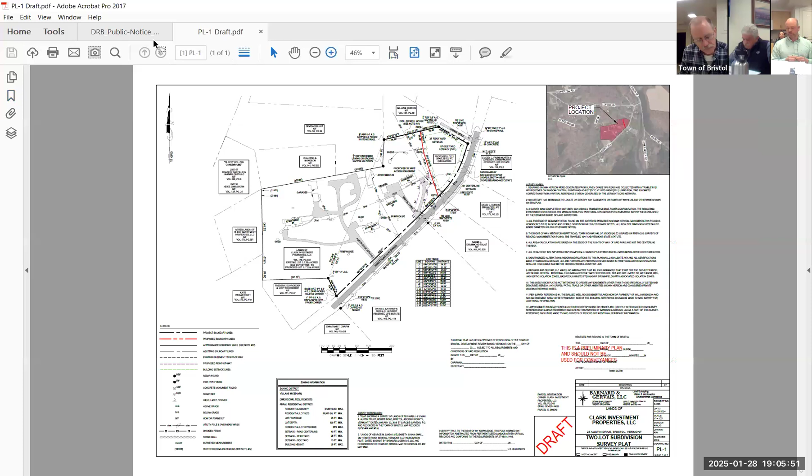The easterly portion of the property, I think everybody is familiar with the parcel, on Hewitt Road. There's a number of residential rental units which Martin and Kathleen purchased about a year and a half ago. That's the two of them. What they're looking to do, their daughter and son-in-law, would like to build a home in Bristol, close to town. They came to us about subdividing off the easterly portion of the property, which is lot 2 on the map, 0.83 acres in size.

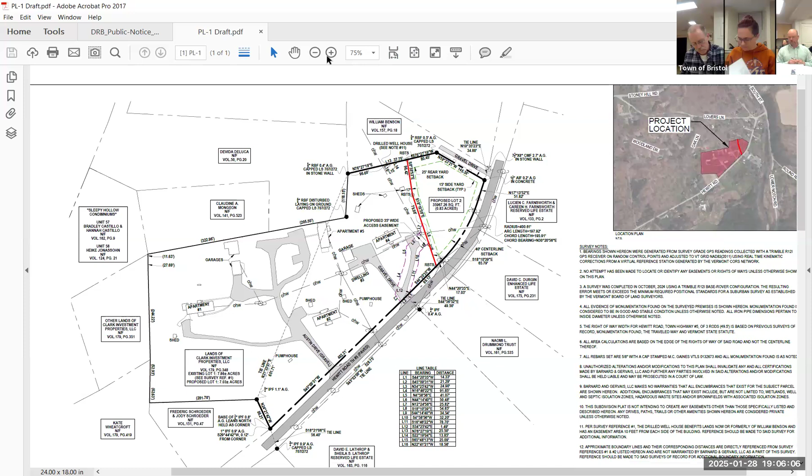There actually used to be, a number of years ago, a mobile home there at one point in time, right about where the residence is proposed for the new parcel. That burned down, right? Burned down. There was an existing wastewater system that was there, and it was connected to the water supply that is currently in place.

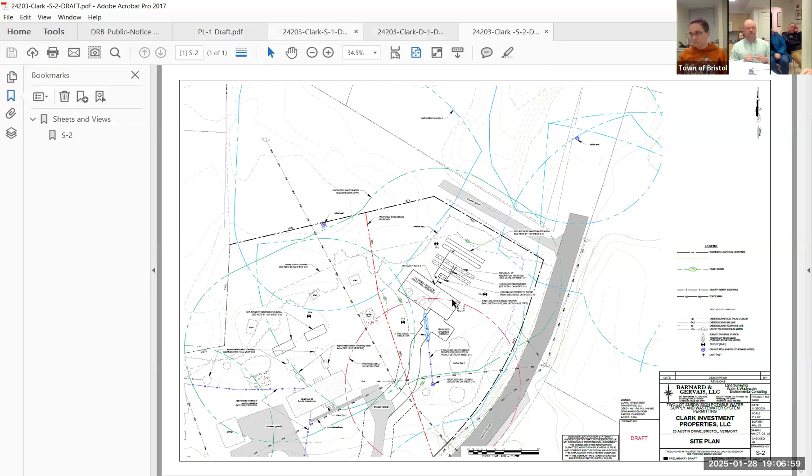Electing to have this parcel be a standalone parcel with its own wastewater system, its own drilled well, and not connect onto the system, really alleviates a lot of concerns in terms of permitting, because there already are a number of homes constructed or connected to this water system. State water and wastewater permit was issued, I believe, in December. AZ, I think you did get a copy of that. So that's a permit for a well and a septic.

Well and septic, and this is the only structure on that septic, correct, yep. And as part of that, we did have to identify replacement areas because that hasn't been done to this point, so we did identify replacement areas for the existing structure.

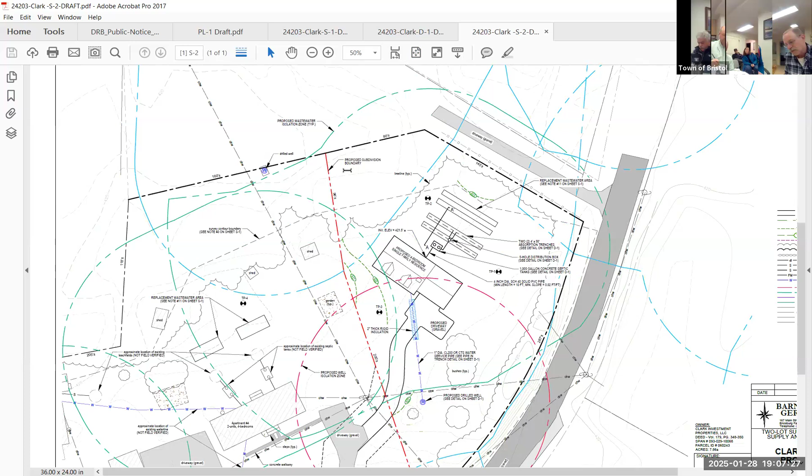That parcel does meet the dimensional standards. We're in village mix, right, AZ? Yes. All right, so that's a 15,000 square foot minimum. We're well above that. We've got rear yard setback 25 feet, side yard 15, front yard 40 foot setback, and all of the building envelopes meet those. Yep.

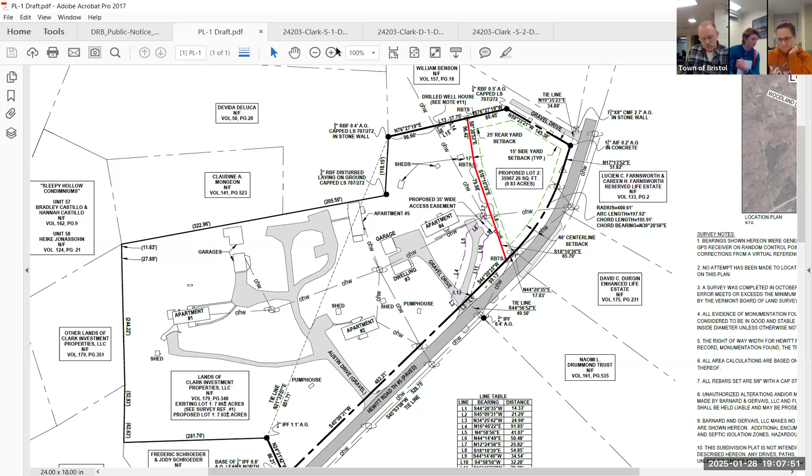On the application, originally there was a street name that had began with an A. Austin Drive. So which one's Austin? Well, there's only one Austin Drive, okay, that's for the three. So it's not this property, the driveway furthest to the northeast.

In amongst the other homes, just at the bottom of the map shown here, that's correct. So the driveway to the northeast says gravel drive, that's gonna be the driveway for the house? That's an existing drive, that'll be shared. The reason why we use 23 Austin Drive is that's what comes up with the property identification. So you can see by the map with the survey plat, the green lines that AZ has on, that's the building envelope, all within setbacks.

So it's probably gonna have a different designation since it gets carved off from that other parcel. It's not even gonna be Austin Drive anymore, it's gonna have a Hewitt Road address. But typically they don't issue the 911 address until you actually pull the zoning permit and buildings go up. That's what triggers the change.

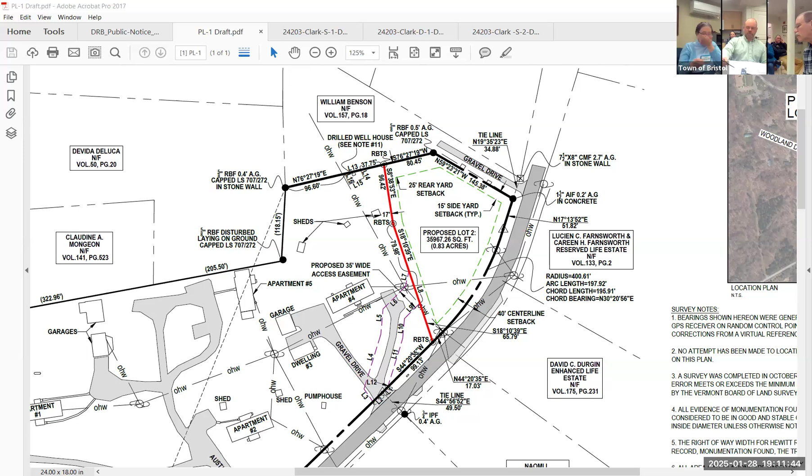So Hewitt Road — oh I see what you're saying, an existing drive into this duplex here. Oh, I see it now, I missed that. I thought we were talking about this one. Nope, that's the right of way. Glad we clarified that — shows up very nicely on here.

Okay, so you're gonna go off of the road that goes diagonally off of lot 1 to the northeast, and then extend the driveway into lot 2. Correct, got it. There's an existing drive, it will be relatively short, and it's a very flat site, very conducive for a house.

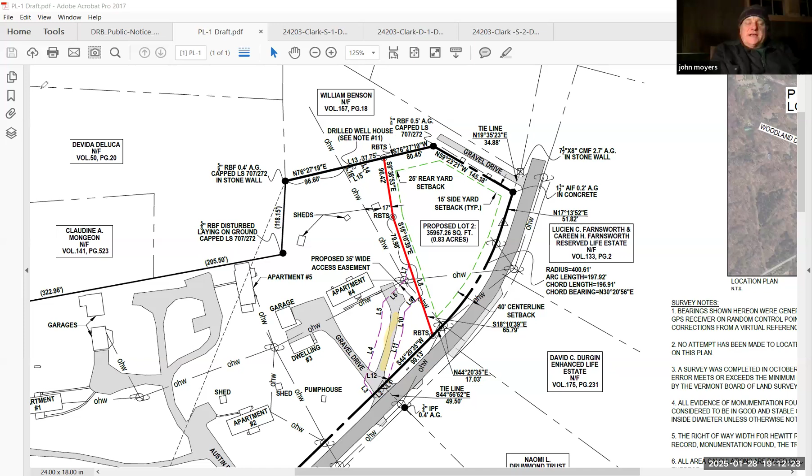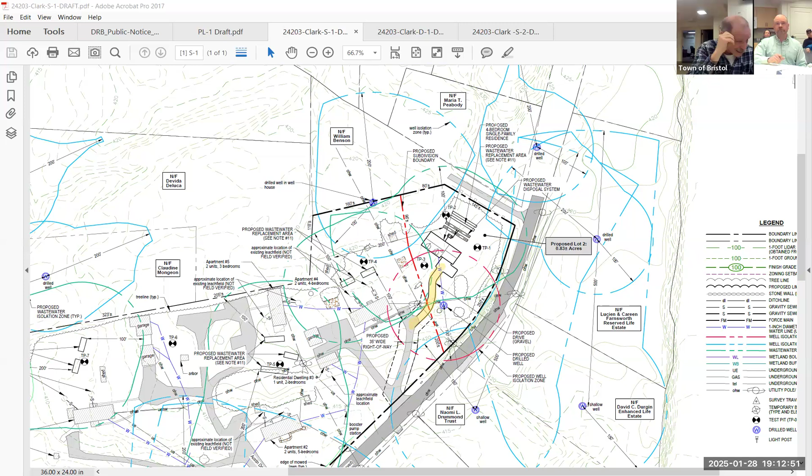Has anything changed substantively about the proposal since we last saw it, other than the information getting finer and refined? Nothing substantial about the project has changed. Yeah, we tweaked some things when my survey crew went down and shot into the building, but we're talking a couple feet here or there with shifting the proposed subdivision line to meet all the setbacks. The parcel has already been surveyed, so we tied into what was done previously. We just cleaned up a few things with regards to polishing up the maps, but it's all the same.

Just out of curiosity, not that this matters at all in this deliberation, but how does it perk down there? Is that just river gravel? It's beautiful — sand and gravel, cobbles, no water table. It's really exceptional.

I always wonder about other parts of Hewitt Road — where that spring is a little further east, it's low in the springtime. You can see the more western end of Hewitt Road is wet, but not so much here, this looks like a little bit of a hill. Yeah, so right up where the house sits there's actually a groundwater divide that protects some of those springs and wells right next to Hewitt Road. This sits on a level hill plateau about 5 or 6 feet above where there's any concern of water table.

And it's all basically ancient riverbed throughout there. Yeah, it's alluvial sands and gravels. Yeah, cool, great.

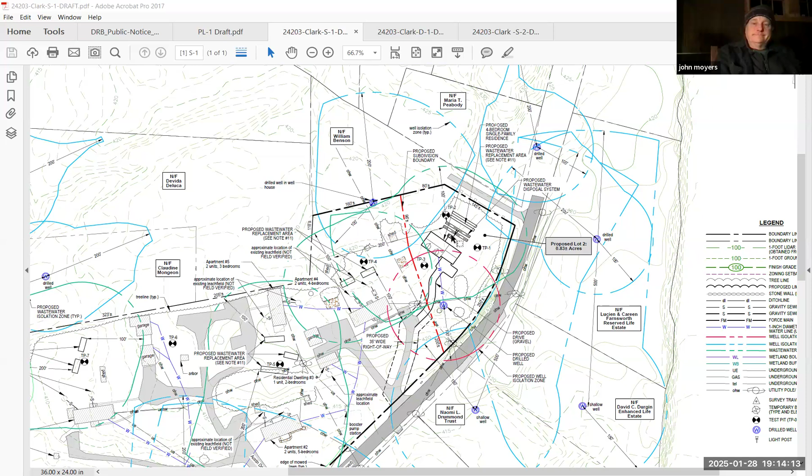Anything else? We get through your list. Have everything here. You said they already have their wastewater permit. They do, yeah, we applied for that in November. And then you've got it.

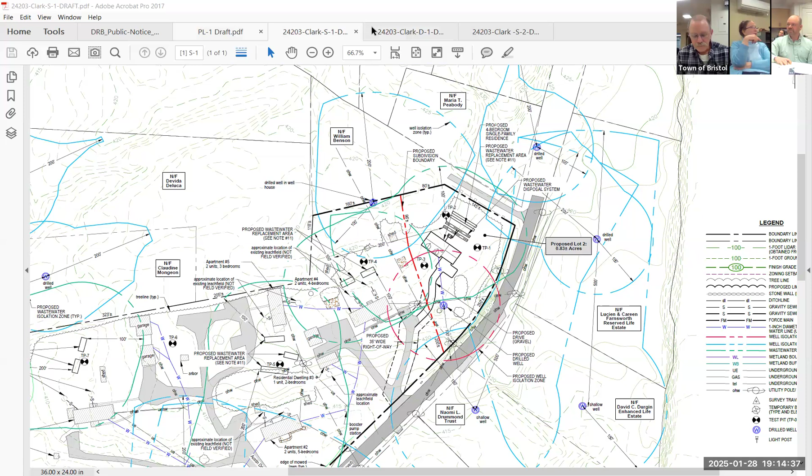By the way, I appreciated your listing all of the dimensions that are listed in the zoning, because usually I have to go find something to. Well, I get sick of flipping open the zoning book too, so if it's on the maps and my guys are trained to put it on there, it certainly is helpful.

It is. Any other questions from the board before we open it up? No other questions? Does anybody from the public have a question or comment?

Tell us who you are. My name's Fred Schroeder. We own a nearby property, and I'm not objecting to it at all, just one question. Are there lot size minimums?

Yes, on that area, 15,000 square feet. This one is more than sufficient. Okay, and does Martin and Kathleen plan on developing more of that property?

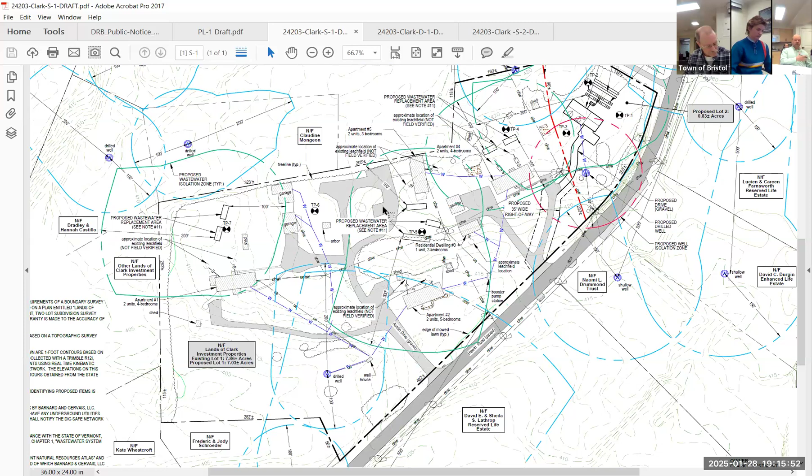They have looked at that, and one thing that Martin and Kathleen have looked at was in terms of affordable housing, they actually have approached us about subdividing, creating some parcels with the existing buildings that are there, so that you can actually sell something to somebody. So right now, they obviously have to purchase this. This is not a property that just anybody can get a mortgage for, because there's -- that's for sure.

There's 8 homes on it. I was shocked the first time you came in with this, I couldn't believe it was all one lot. Yeah, that's when I saw it. I was like, I could have sworn we had 2 or 3 lots there.

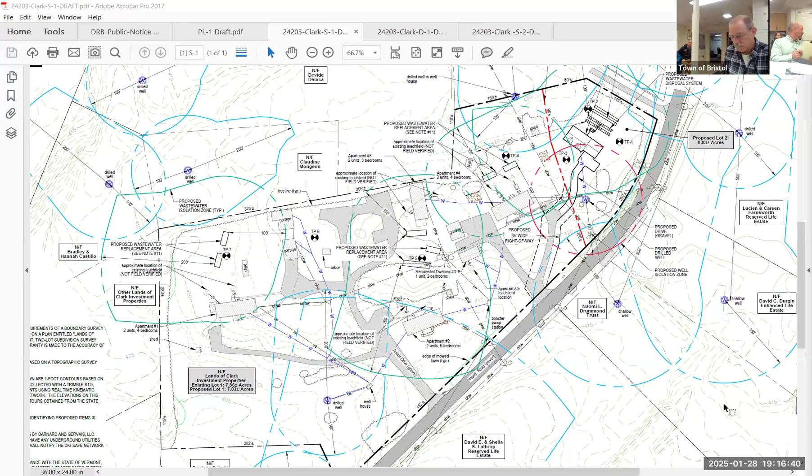No, they would like to in the future look at carving off some of those existing houses that are there, just so potentially, if they wanted to sell one, or a young couple wanted to buy one and rent out one of the duplexes, that's what they'd like to do. So, sorry, so they potentially would want to just carve out the houses, but they wouldn't want to carve out a chunk of land to build a house on? They would look at it, yeah, potentially. Yeah, if they subdivide, if they want to make more lots...

We'd have to come back in here. Right, so would that cause additional runoff then down into our property, with all of the natural gravel being either asphalt or packed dirt? But right now, there's nothing, that's not proposed at all.

And actually, I'm familiar because I did the permit for that one, and I did the permits for the house next door. And I wouldn't be concerned with runoff from you, because if you look at where the topo contours are, your parcel actually sits up above this 405 contour. Anything that would be coming off of the investment property would actually get intercepted by the low point.

And it would go towards the other properties that they already own above where the gingerbread house is. So yeah, that makes sense. So yours is pretty well protected, pretty well isolated from, if you're talking stormwater runoff. It is elevated a little bit. Yeah, I know what you're saying.

Any other questions? Sean has one, just a comment, not really a question. Again, not really bearing on our question here today, but as the owners look at developing this particular parcel, I hope they might look at the placement and size of the main residence, because this is ultimately a fairly large lot, a nice sized lot. There's some ADU potential there, so that might be something they want to preserve as an option down the road, and they don't want to build themselves out of that option.

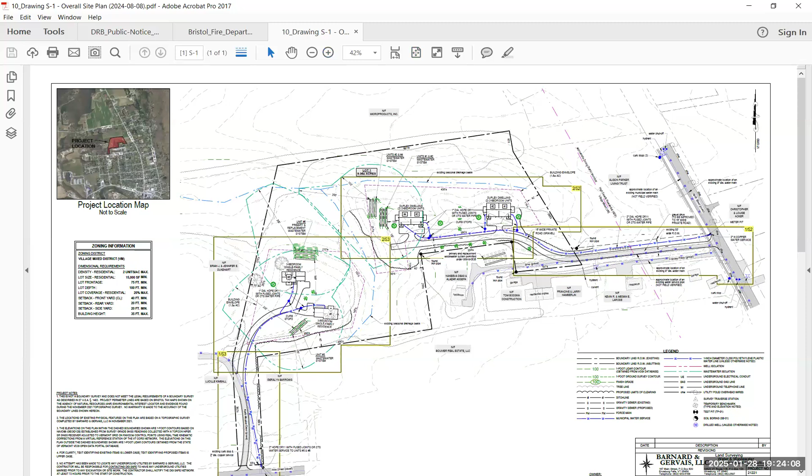Perfect. No, yeah, I just wondered what sort of things. Let me give you a little recap.

There's what we consider to be the easterly side of the project and the westerly side. The westerly side will come off of Pine Street. There's already an existing gravel drive that goes in, past Lucille Kimball's property, where there's an existing access road now. There's a nice open field where those two homes would be situated. They would have views to the north, very well-drained sands, so no issues with the wastewater. We do have the wastewater permit on that.

So 4 units coming off North Street: two duplexes coming off North Street, and two single-family homes coming off Pine Street. Those have remained consistent. We tweaked some of the locations. We were finalizing all the stormwater stuff today.

That was submitted with the last packet where we had showed you the stormwater infiltration area between the two homes, and other than the letter from the fire department, we did swap out the light fixture. John brought that up at the last meeting, so there was an opt-out for a new light fixture where the bulb was actually recessed up into the unit itself.

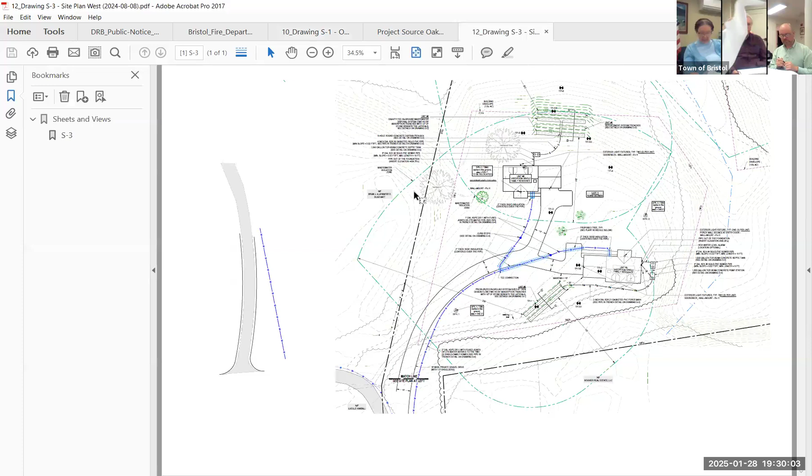Right, and so the King's memorandum - so he saw the revised version. Actually, we revised it and then sent it to him and then he approved it. Okay, so he saw S3, he did - S1, S2 and S3. Those are okay.

The only changes - and if there's not a revision date on your top title block - with the exception of widening those shoulders, that's in the Y down by the houses, those were the two changes.

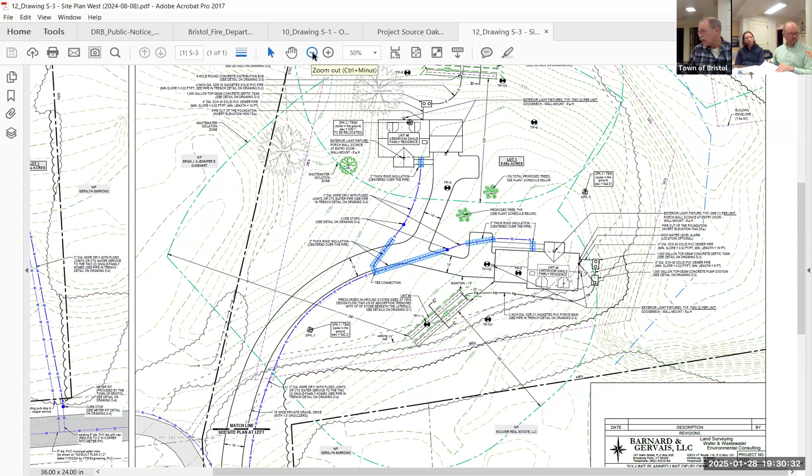So there's not gonna be any... it's all one lot, so there's no common area. Correct, you're making two duplex apartments. Well, so how are you handling the two single family homes? That's gonna be, well, it's all a PUD I guess, but there's no common land?

Well, the whole parcel is in itself - I mean, Adam and Amber are gonna retain ownership. As far as the open space, these are all gonna be rentals, that's the plan.

So the renters would have use of it, but you don't have divided ownership. So both of the single family homes are also gonna be rented? Yes, as of now, yeah.

Who knows, 30 years from now, but... Unless Adam, they ever come down to build one, then we would subdivide. Well, or if you're gonna have common land, you've gotta have declarations and rights and responsibilities to lay out people's rights with the common land in order to comply with Vermont law. That's part of the PUD regs as well, but since right now it's all rentals, you don't have to deal with it. But if you were to go to individual ownership somehow, then you're gonna have to deal with that common land.

We did talk about that last time, a little bit. In a lot of cases - like we're doing a lot in Burlington right now - where they could eventually, Adam and Amber could condominiumize these parcels, that's the thing, and just do a 5-foot lot right around each one, or split it, even the footprint - and then they could retain ownership, and it could be common land at that point.

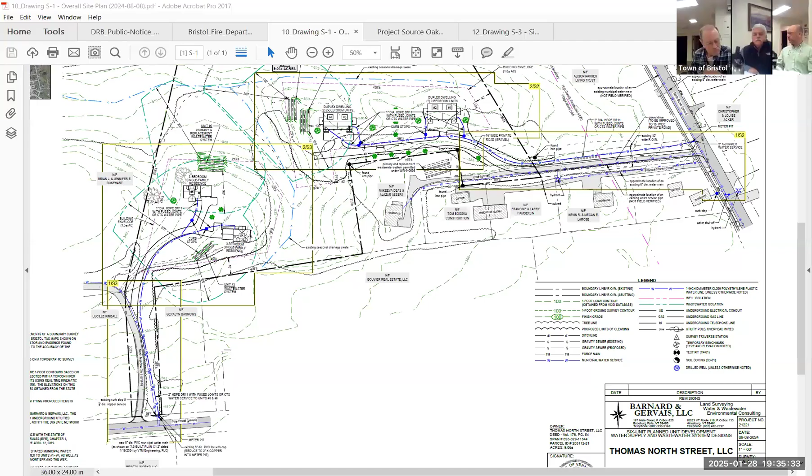So you have two different meters, right? Yeah, there's the main meter out front, and we actually talked about having meters at the houses too, so each individual could get their own water meter, which is smarter, or Adam and Amber can set the rent accordingly. They could have one meter in the meter pit, but it is required to have the meter pit.

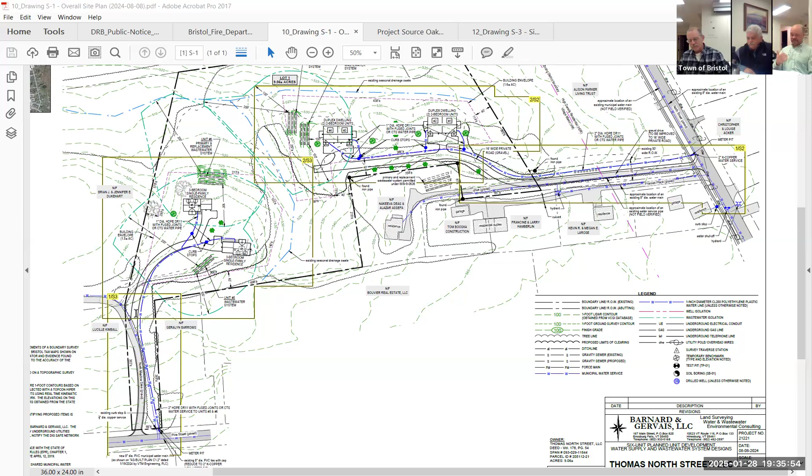We went around on this—it was the big holdup for like a year, figuring out how this gets constructed, and eventually taking a line and all of that. Doing the calculations for the line was a piece of cake, that's not hard at all, just math. It's the cost—when you start talking about 8-inch ductile iron, that cost jumps up pretty quick, quite a bit.

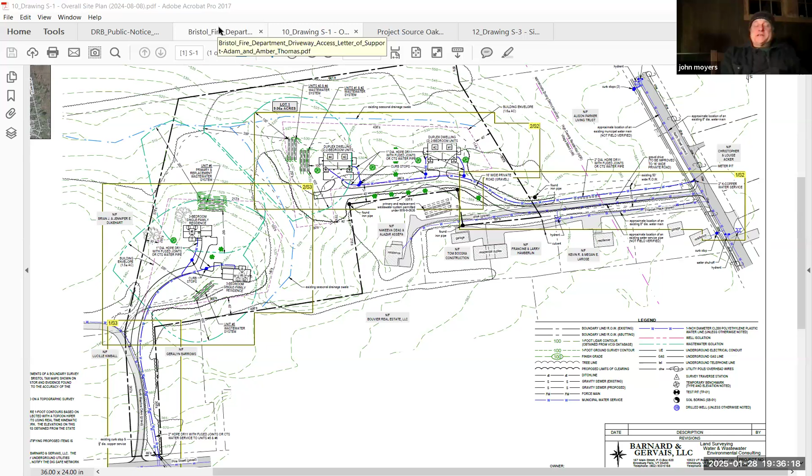John has some comments. A few random things: that sheet from the fire chief might be nice to keep on hand—you could almost get ahead of the chief if you handed that out to anybody coming in with this sort of situation. That's a very nice presentation, it's got all the information, a little diagram. Anybody coming in with this sort of proposal will need that eventually, and if they got it when they walked into your office first thing, that would be pretty good for them.

Second comment—I really appreciate you guys responding to my concerns about lighting. Thank you for doing so seriously and in such detail. I think ultimately it makes a big difference as we build out the village.

Lastly, as you alluded to earlier, I'm a big supporter of this, I'm going to vote yes on this. But I note that it's immediately north of the more densely packed part of the village, and there's some very nice terrain here. I hope you don't build yourselves out of options for even perhaps greater density in the future. I understand we're late in this particular approval process, and that's okay, but...

This is a great place for density, so I would only offer that if you go home and sleep on it and think, yeah, this is a great place for density—meaning a couple of different changes, maybe the driveways are longer, creating some more logical spots for future infill—and you needed to come back to us, I think I for one would be receptive to a quick change, if it meant you felt good about even more density in the future, because this is sort of the margin right now—it's the future village down the road.

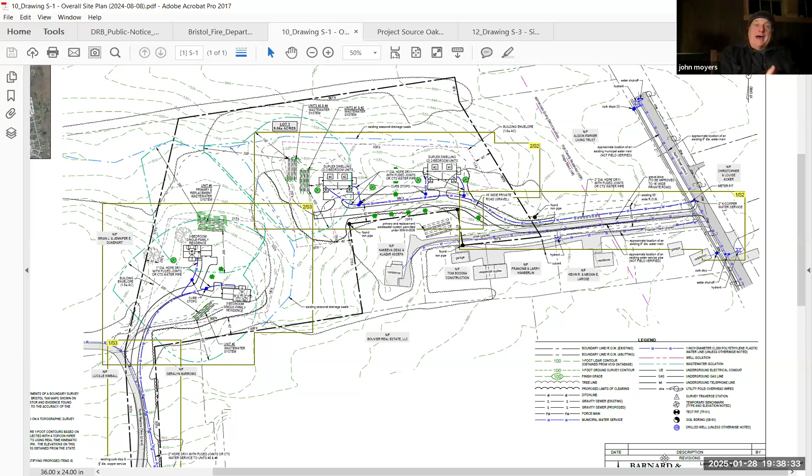So, I think you got a good thing here. I'm gonna support it. But I look at this nice, beautiful piece of land and the nice proposal you have for it. And I think, there's at least some ADU potential there, maybe some other stuff. Anyway, just off of that.

I'll speak a little bit to that, John. The easterly portion, with the topography and with how the stormwater has to get treated on that side because of the length of the drive, it would be difficult to pack more units in there and do it nicely. But on the westerly side, in that field where the two single family homes are, there is more opportunity there for sure.

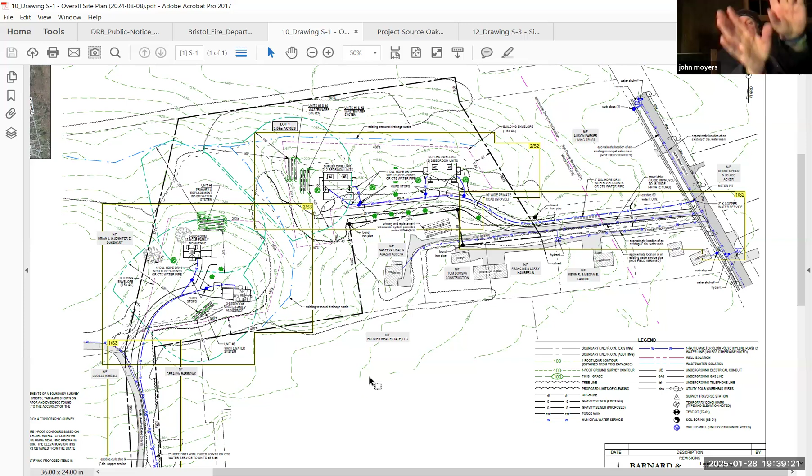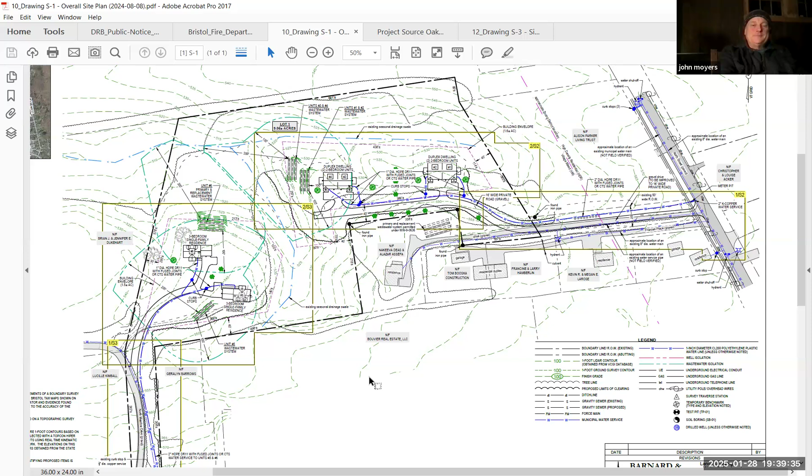Right, I mean, it's not really my place, but my one thought is, imagine those two single family homes run up more to the north along a longer driveway, essentially exactly as they are now, but just pushed up to the north a little bit. Then between the main road access and those new homes, there's some ADU potential or something like that. Anyway, that's not going to affect my vote tonight, but when I look at this plat, I can't help but think that.

Anybody have questions from the board? Any additional questions? Have any more information to give us? Mr. Lathrop?

It's actually not a plat, it's a site plan, because... Right, so.

Is the water line coming off Pine Street the same thing? We have a meter pit right close to the right of way. It says it really small, but it's there. So from the meter pit on, it's all you guys. It is, yep, they own it. And it'll be new pipe, installed correctly, and didn't have any issues.

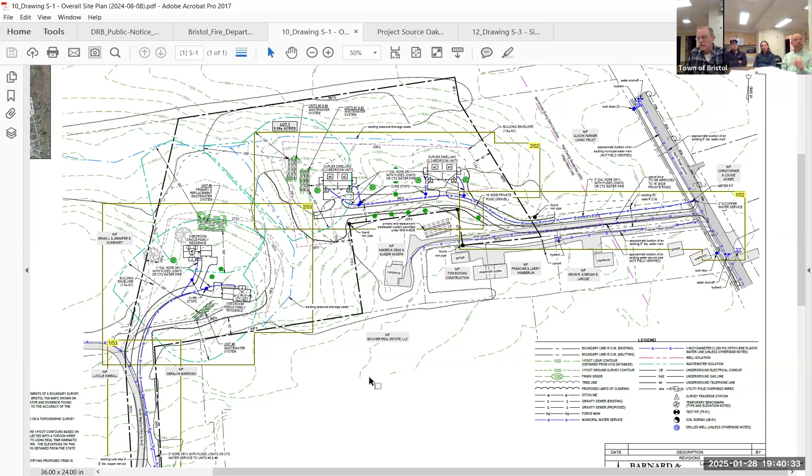Any other questions from the board? I'll move that we approve the PUD application as submitted.

A second. I don't think we have anything else to add, other than, with the condition, we'll keep the lighting condition that the bulb must be recessed within the shade, but if there's a different type unit that you choose, that's fine.

We're not gonna micromanage the actual measure of the diameter of the gooseneck itself. He said it had to be 3/8 of an inch. Trust me, we got up there, you guys police all that. No, that's all me, that's all me.

Never underestimate the power of the wind to parachute that shade. I know what you mean. Crazy torque, yeah, what John said. Yeah, you have to, don't underestimate Mother Nature. I live on the edge of the bank here, right, that goes down to the river bottom, and because of the vegetation, there's always wind going east or west above the bottom, it kind of flows through the low point. So we get these cyclonic winds along the bank here. They're like mini tornadic winds, and they have lifted light fixtures completely off of the outside of my building. It may be unique to this spot in the village.